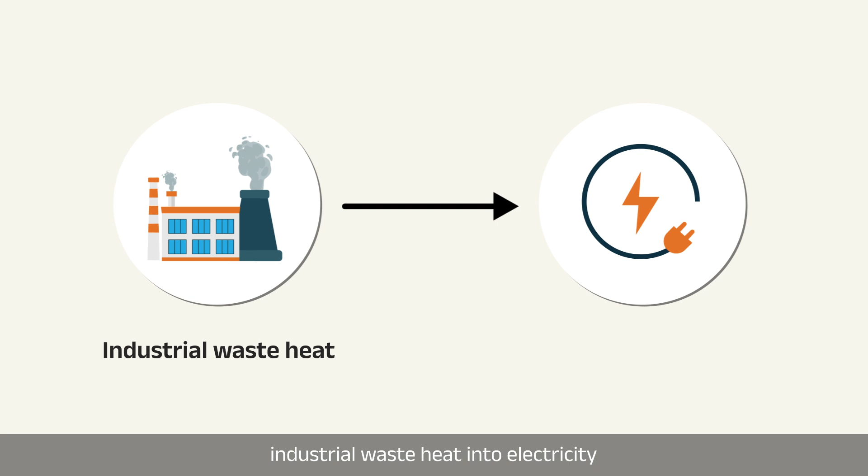Welcome to INFERNO, an initiative funded by the European Commission under the Horizon Europe framework. INFERNO is a 36-month project led by 6 partners from 3 European countries and aims to develop a system to turn industrial waste heat into electricity with an innovative design strategy.

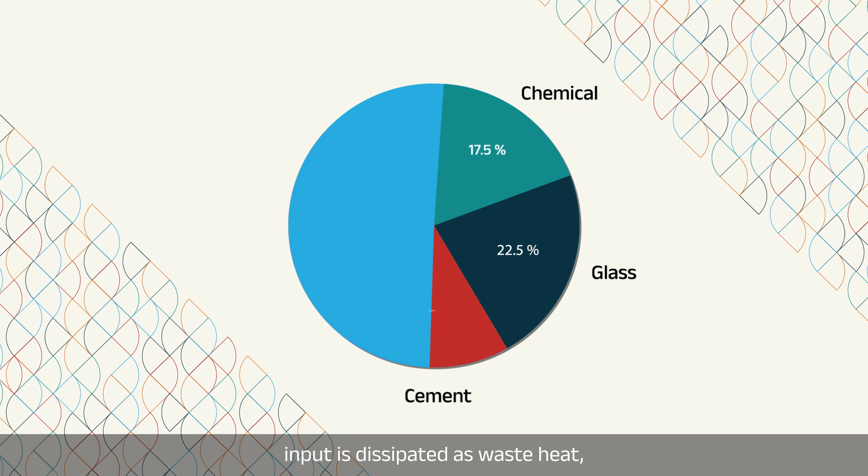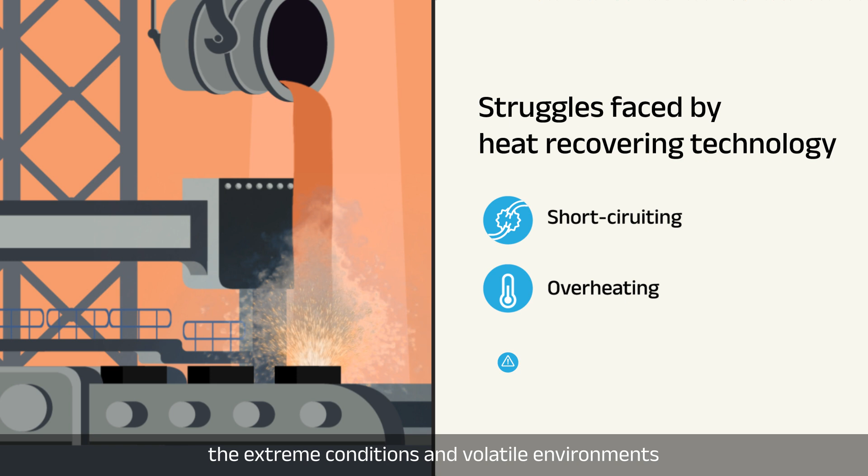High-temperature industrial processes are inherently energy-intensive. A significant portion of this energy input is dissipated as waste heat, representing a substantial economic and environmental liability. Current waste heat recovery technologies struggle to efficiently operate within the extreme conditions and volatile environments characteristic of these high-temperature industries.

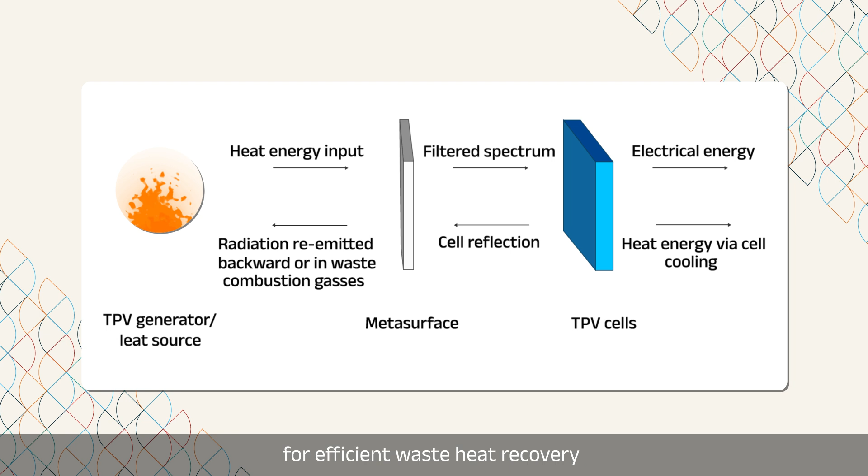The INFERNO project addresses this critical need by developing a novel hybrid solid-state system for efficient waste heat recovery and conversion into electricity. This innovative approach integrates thermophotovoltaic cells, a meta-surface collector, and thermoelectric generators into a single modular system.

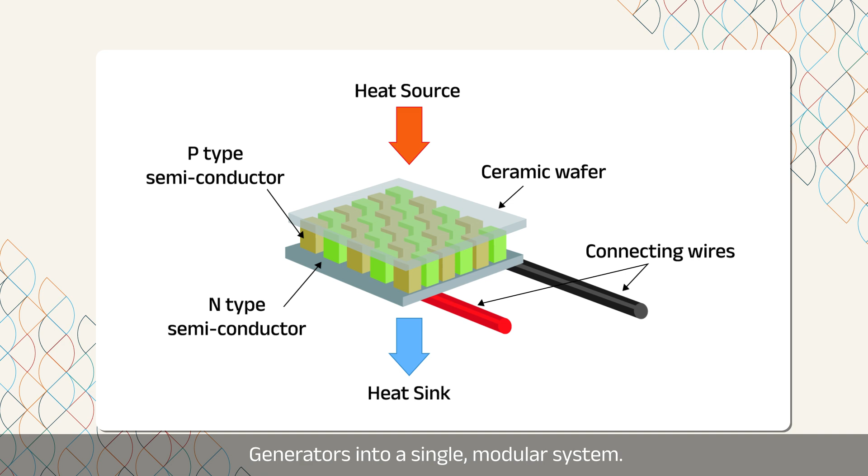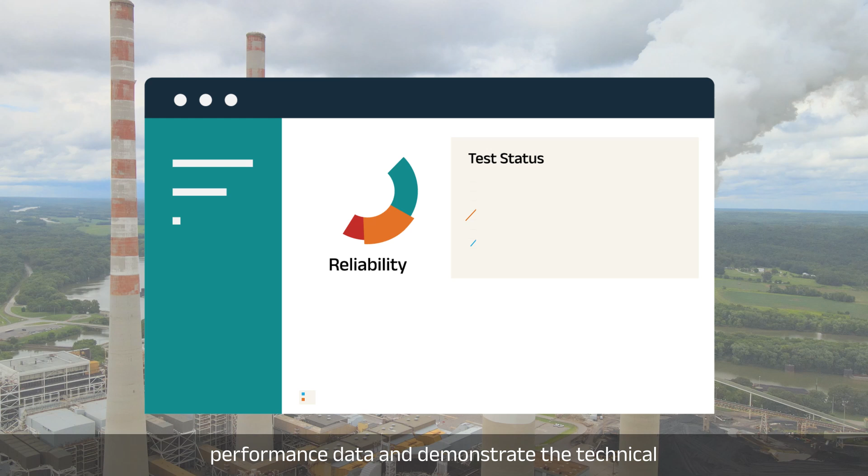The INFERNO project will implement and validate 3 pilot demonstrators within real industrial environments. This rigorous testing will provide critical performance data and demonstrate the technical and economic viability of the technology.

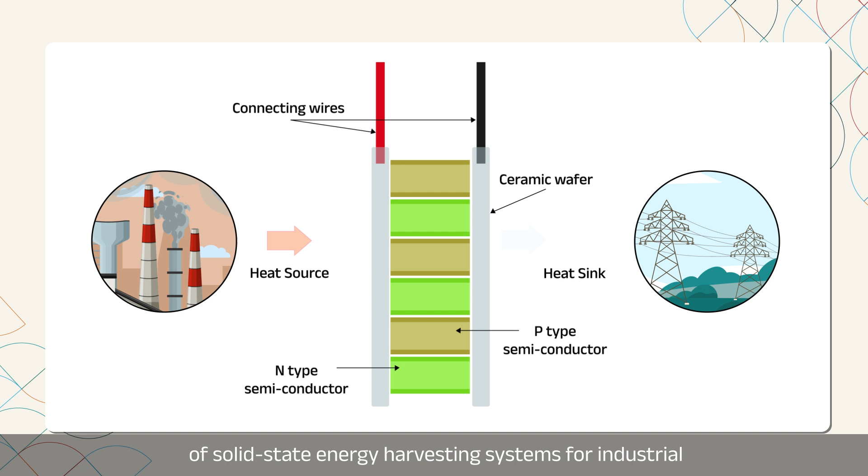By establishing a novel framework for the design, modeling, and integration of solid-state energy harvesting systems for industrial waste heat recovery, the INFERNO project contributes significantly to the advancement of sustainable manufacturing practices.

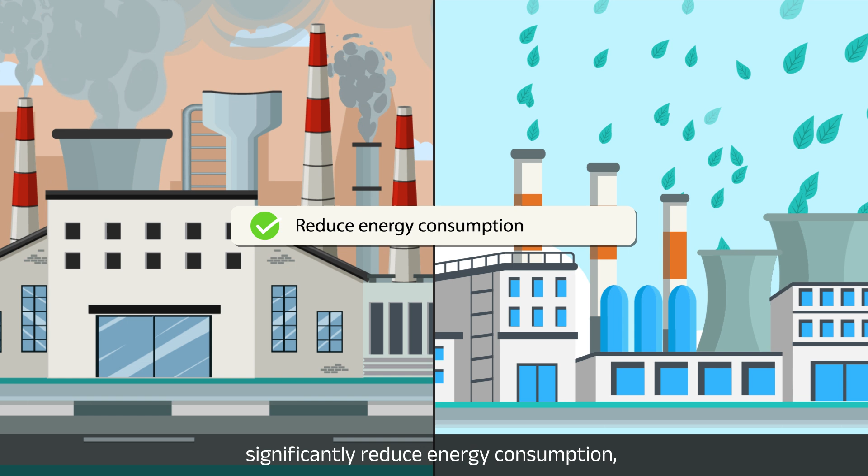This technology has the potential to significantly reduce energy consumption, decrease greenhouse gas emissions, and enhance the competitiveness of energy-intensive industries. The INFERNO project represents a significant step towards a more sustainable and resource-efficient industrial future.